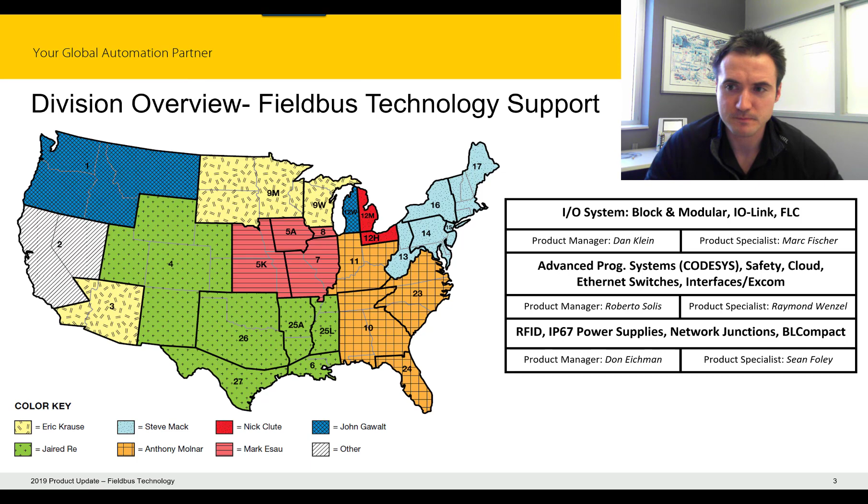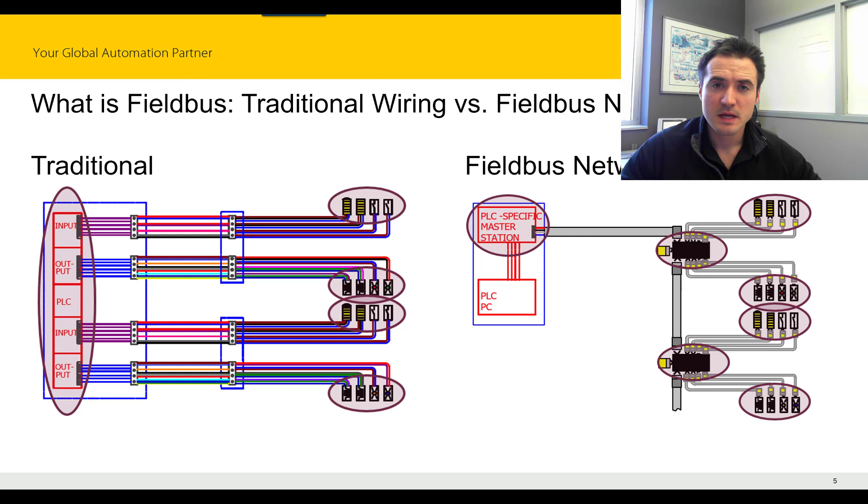So on the right is what Turck specializes in. It's a Fieldbus network. So instead of having each field device wired directly back to a PLC, it goes through these Fieldbus I/O devices, block I/O or modular I/O devices that are connected to these field devices, and then a single connection point, usually by an Ethernet cable or some other communication protocol, going back directly to a PLC. So it's a lot more efficient. As you can see, it's a lot less wiring. The troubleshooting is much easier, and it's also going to be a lot cheaper.

So the next thing we're going to cover is Turck distributed I/O. Turck has developed an under-the-hood technology. Our distributed I/O products are all multi-protocol. So they encapsulate the three different Ethernet protocols: EtherNet/IP, Modbus TCP, and PROFINET. They're also available in flexible topology types, so star topology, line topology, and ring topology. Okay, so what are our distributed I/O products?

Firstly, it's going to be our in-cabinet modular. So let me show you what an in-cabinet modular solution looks like. So this right here is our BL20. With modular, the key thing you're going to want to consider is flexibility. So our modular I/O, this is the BL20, it's going to be an IP20 solution. So BL20, IP20. And so this is designed to be in cabinet.

Because it's IP20, it's not resistant to things like dust and liquid, so it has to be in some sort of cabinet. But the key thing here is you have flexibility. So you have your field devices, your sensors in your application going back to these I/O cards. And you select your I/O cards depending on the type of field device you're using. So if you're using discrete inputs or analog inputs, you select the corresponding card, and then you constantly expand the modules depending on what you're needing. So you could constantly plug in modules to fit the application that you're using.

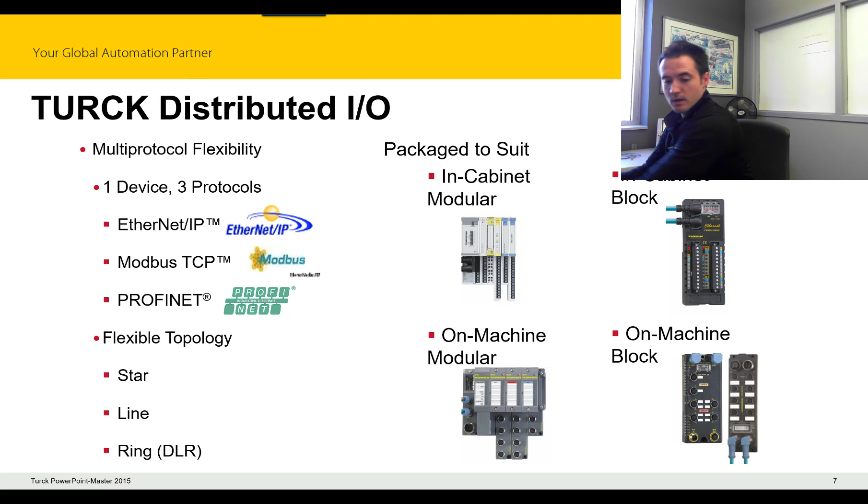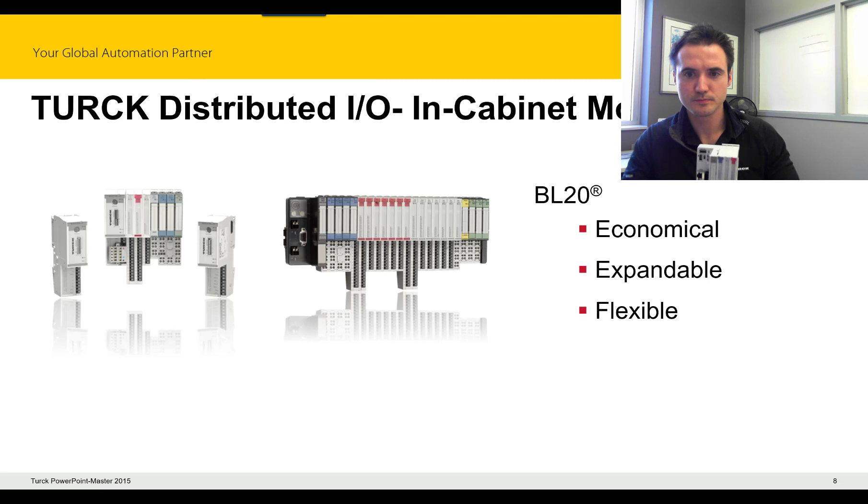So like I said before, covering it again with the BL20s, key things to cover: it's expandable, so you can pull out the modules, clamp them back in, and you're good to go. It's expandable, flexible, and also very economical. Similarly with the on-machine modular, it's rugged. It has that flexibility, so you could select the right I/O card for the application depending on the type of field device you're using. You can expand it. So this is your I/O card, and you select this based on the type of field device you're using in the field.

And the one major concern I see with a lot of people with the modular stuff, like the BL20 and the BL67, is it can be a little intimidating at first to figure out how to select the right part numbers for all these different components. And the thing I say is not to worry there. We've got some great resources for how to do that. We have a how-to video that shows you how to build a BL67 station in minutes. It's not difficult. We use a software called Packware to do it, and it's a breeze.

It's really quite simple. As long as you have the software downloaded, you basically give the criteria for what field devices you're using, what protocol you're using, and it automatically checks and verifies that the station part numbers you've selected are compatible, and you're good to go. It creates a station report. And we're going to cover that in the lab, so I'm not going to go into it too much now, but if your concern is about modular, selecting all the part numbers and it being tricky, not to worry. We've got some great tools out there for you.

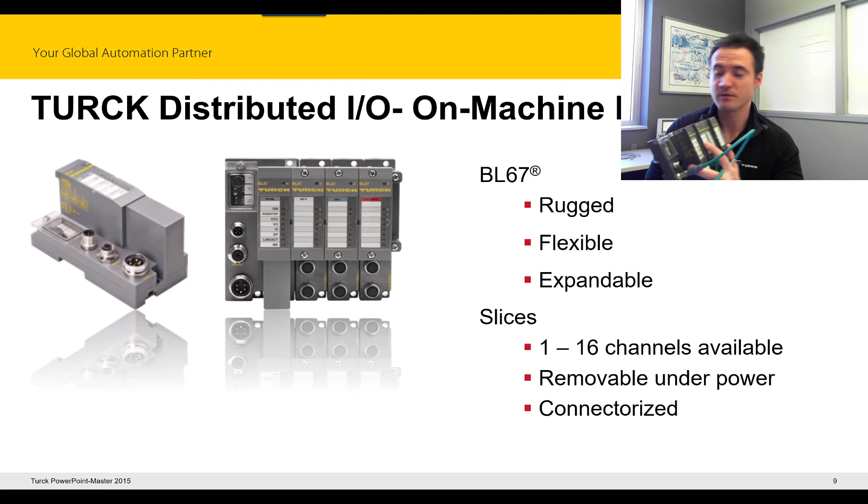Next thing will be this image here I wanted to show as well, just showing the ruggedness of the BL67. As you can see here, the BL67 is located outside in a process plant. As you can see up here, there's snow. The BL67 is rated for temperatures down to -40 degrees Celsius, so it can survive in the cold just fine. And just to show you, it's exposed to the elements and it holds up just fine.

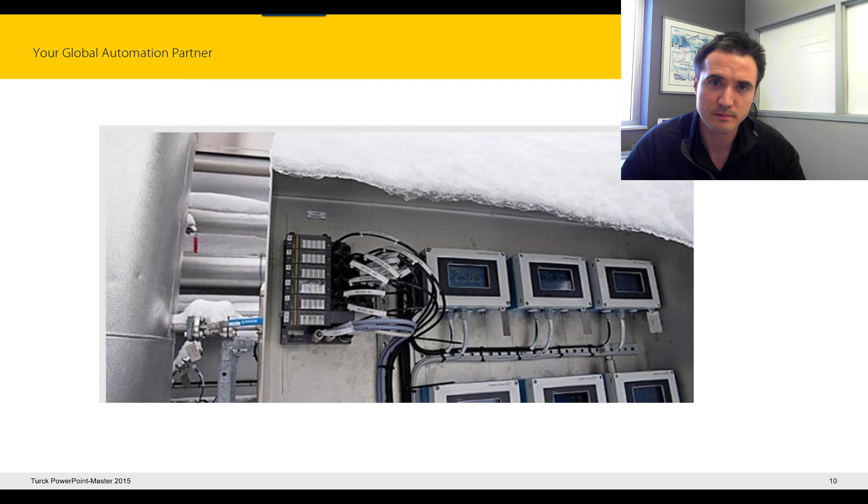As I mentioned before, for selecting the modules for modular I/O options like the BL67 or the BL20, we have a tutorial video called How to Create Station Reports, and that'll help you select all the different components for building a BL67 or BL20 station. The video is about 4 or 5 minutes long, great to follow, and if you have a customer who's trying to build a station report, it's great to send out to them as well. Be sure to check out that video. It's a good tool to get you started.

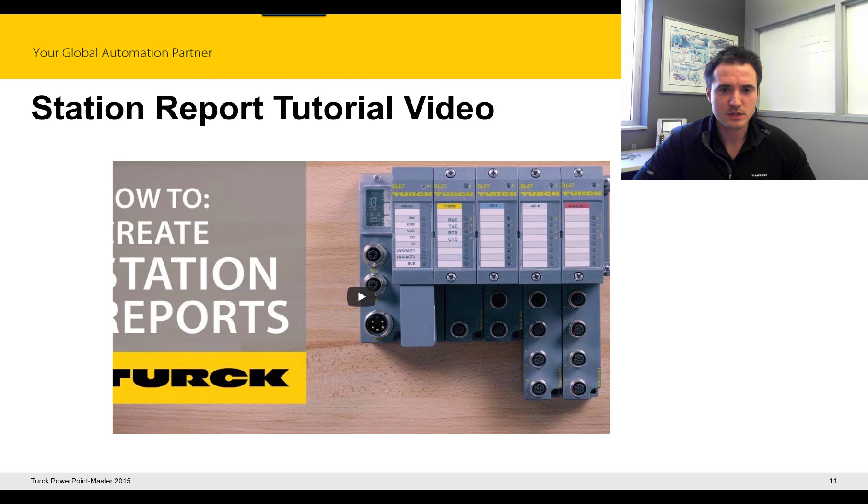As I said before, in cabinet block, we have solutions like this. They're very economical, very compact. I mean, you can fit this in your back pocket. It has fixed I/O configuration, so it doesn't have that same level of flexibility as maybe the BL20 or BL67 does. But if you know you're using a certain amount of discrete inputs, it's a great one to have and a very economical solution.

Let's go into on-machine block now. Whoops, sorry about that. Jumped ahead a little bit.

And another thing that's important to mention is that these are also available in all sorts of different protocols, not just your Ethernet protocols. They'll be available in AS-i, DeviceNet, multi-protocol Ethernet, like I mentioned before, and Profibus. Similar with the block I/O, it'll be available in all sorts of different protocols: AS-i, CANopen, DeviceNet, industrial Ethernet, and Profibus.

We have this, our TBEN-L, it's a TBEN large, with kind of fixed settings for what you're using. We have a lot of different part numbers depending on the type of field devices you're using and connecting to this. This one's the discrete input version, so it's a TBEN-L-16DIP. In selecting blocks and these components, it's good to become well versed in Turck's part numbering scheme. I created a video earlier that goes over the My Turck app, and it shows you where to find those part number keys. If you check out the part number key, it'll help you select the right block for the application.

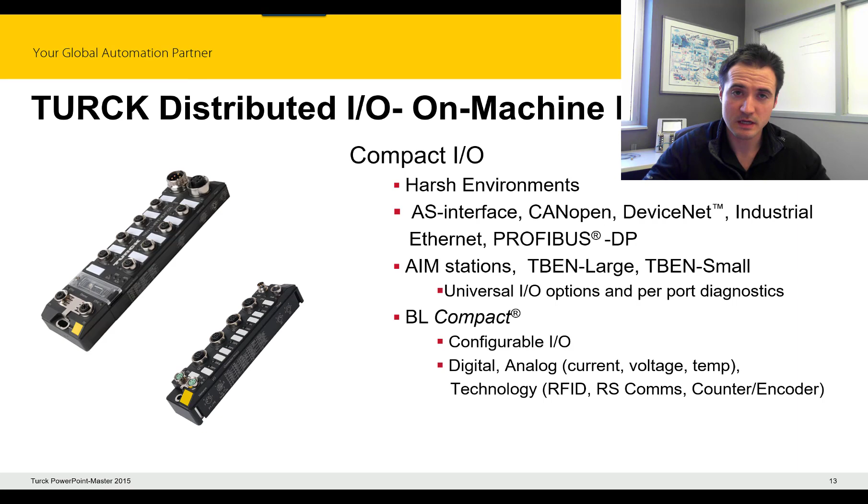And that brings me to, with our block I/O devices, both on machine and in cabinet, we have this really amazing software called ARGEE. ARGEE stands for Really Great Programming Environment. It's a proprietary web-based programming environment that Turck developed that allows you to have simple logic on the block without the need of a PLC. So let me just show you an example here.

So take a look at this application. It may not look like much at the beginning, but this is all controlled by a single block, no PLC necessary. It's a yogurt carton, and there's a small camera here on the right that's detecting if a label is missing or not. If a label is missing from the carton, the camera will send an output to this block, this TBEN small, and the block has an ARGEE program written onto it. When the camera detects that there's not a label on the carton, it'll set a timer in the logic on the web-based program environment, and then it'll turn on this air cannon. So let's just watch it again here.

Let me just do this. My apologies, having a little bit of technical difficulty. Let's see here. I want to show you the video again, but for some reason it's not working for me.

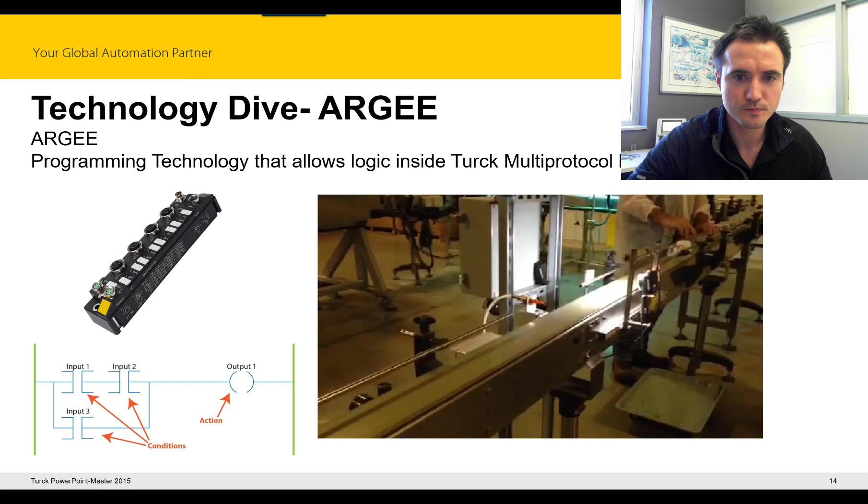And also with ARGEE, imagine having a little field logic controller about the size of this, fit it in your back pocket, show it in front of a customer, plug it in, launch the web-based program environment, show how many cool different things you can do. It's a really powerful demonstration tool because you have a demo that you could fit in the palm of your hand that's really cool and has a lot of power.

So we also have a tutorial video for that. It's called How to: My First FLC with ARGEE. The ARGEE video goes into the first steps of launching ARGEE, and we go through a very simple application example. In this application example, I have a sensor here, this little yellow sensor that's counting toy cars, and it counts 6 cars, and then it turns on this, I'm not sure if you can see it here, but there's a small little Banner light.

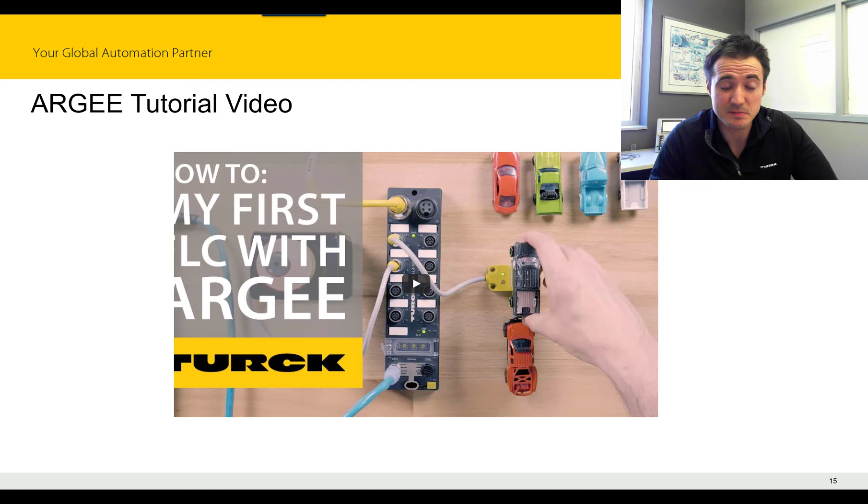So once it counts 6 cars, it turns on the Banner light, and then after 5 seconds the light turns off. So it's just a really simple application to introduce you to ARGEE. The video is 5 minutes long, so it's a good one to check out. It's a really cool tool to have, and also to send to customers as well who might be getting started with ARGEE.

So Turck RFID, we have a full line of RFID transceivers and tags as well, and different interfaces too. So like I said, with our blocks, we have RFID channels that can go back to your PLC. We also have it available in modular I/O solutions. So we have RFID slices that are available, and similarly with the BL20, we'll have RFID channel slices, if you will, that allow you to interface your RFID transceiver back to your PLC.

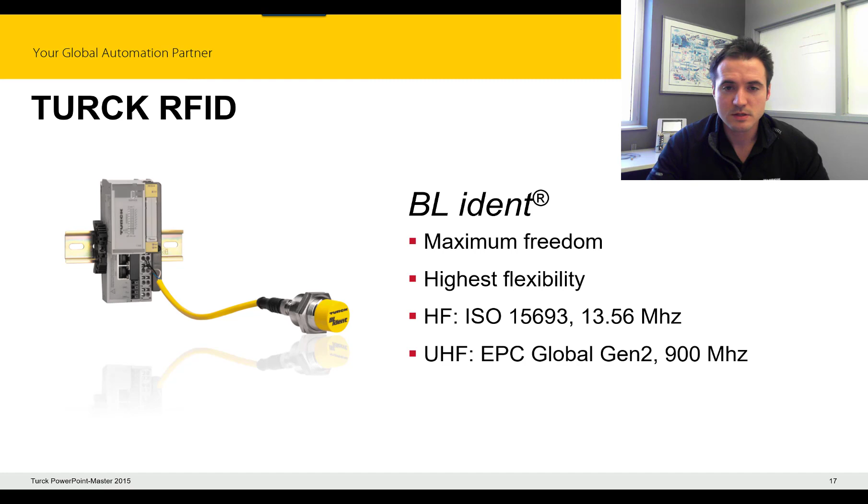We're going to dive into RFID later on in this seminar, so I'm not going to go into too much detail, but RFID stands for radio frequency identification. It's the wireless transfer of data for tracking. A tag is a small device with microchips and an antenna, and that gives them the ability to store and transmit data. The transceiver is the brains of the outfit and reads data from the tags and writes data to the tags.

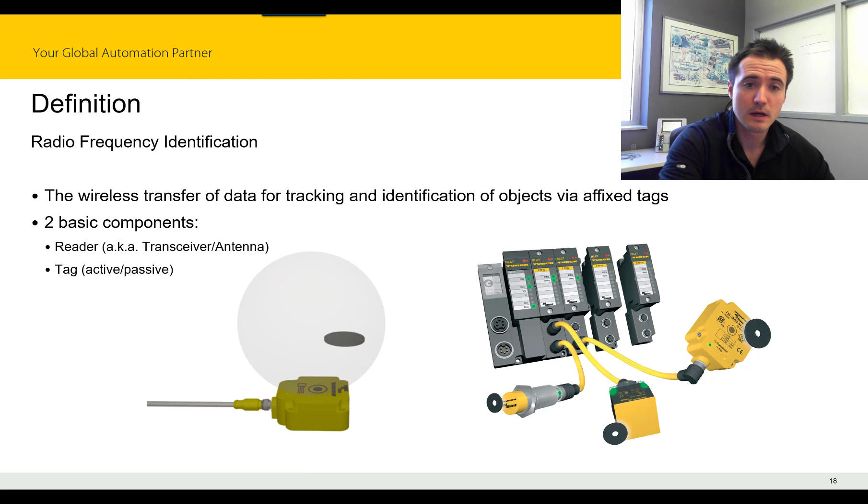So you can see here it's a BL67, so we've got an RFID channel connected with a cable to these different transceivers, and then you have the tags that you're reading and writing to. So we have the reader, the tag, and the interface, or the key components. Turck has a full line of different transceivers. I won't demo this video. You could watch it when you have time.

But transceivers, we have a lot of different transceiver styles and a unique blend of design. So let me just show you a few of the transceivers we offer as an example, just to demonstrate the sheer size. There are going to be ranges for all of our transceivers and tags. In general, the larger the transceiver, the larger the range you're going to have for reading and writing data to the tag. So an example would be, we have one that's about this small little guy, like this.

You know, the range is not going to be very high in this one, but if you look at, say, this one, this is an HF, our largest HF tag. It's like the size of a pizza box. This one's going to have a much larger range. As you can see, it's massive. And it's not just those.

We have different options here, tons of different transceivers to choose from, and we try to match the transceiver for the application. So RFID applications are really good to get BDMs involved in, because it just needs some getting started, trying out different transceivers. They could bring in different options to test out for the application. And then I also want to show you some RFID tags that we have.

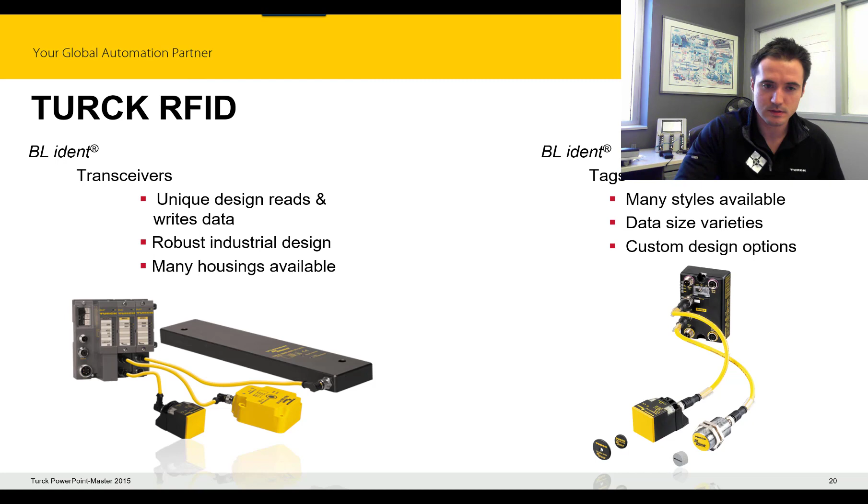But for UHF, typically the range is going to be in meters. For HF applications, typically the range is going to be in inches and feet. So it's not as broad of a range. We're going to dive into more depth on RFID later. Sorry, here.

There we go. We also have Turck Vilant Systems. So this is an exciting development for RFID. For the first time ever, since we acquired Vilant Systems, we're able to provide full RFID turnkey solutions. So full system design, consultation, implementation, and more. So start to finish, an RFID application where we could bring in whatever is necessary to solve the application and design it for the customer, and then provide them the software, a start to finish turnkey RFID solution. So we consult them, we review the application, and we have full 24/7 support available for the customer as well.

This is unique. There's not a single company in the United States that has the same abilities as this. It's a truly unique solution. We're extremely excited. So if you have an application that might need something like Turck Vilant, feel free to reach out to us. Raymond Wenzel is a specialist for Vilant systems, so he'll be a great resource to reach out to if you have any questions on Turck Vilant systems. So be sure to reach out to him if you have any applications that might require Vilant.

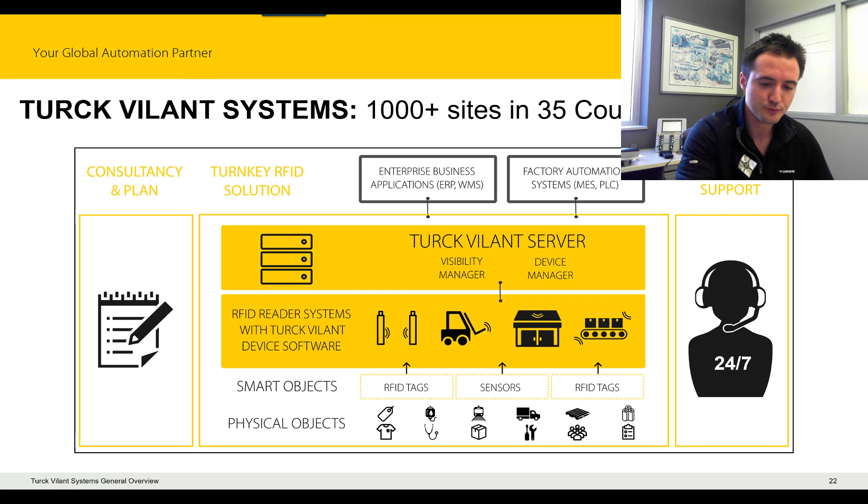So I'm going to go into a little bit of a technology dive here. A really cool product that came out recently is our PD20. So this is our PD20 device, and basically what it is, you can see there's a small little audio jack here, and it plugs into your phone. The cool thing here is we have an app. Let me just show you it here. I'm not sure if you can see it very well on my phone, but we have a Turck RFID app that's free. And basically what you do is you plug in using this jack here.

Using this jack on your PD20, you plug it into your phone on the bottom, and then you launch your RFID app, and it's free, and you can read and write data to tags using the RFID app. What's cool about this is that it's really economical. RFID handhelds typically cost thousands of dollars. This is $500 list price. So it's a mobile UHF reader and writer.

The app is free, so if you want to search for the app, just go to the App Store or the Google Play Store; it's available for Android and Apple devices. If you just search Turck RFID, you'll find the app there. The key thing is it's IP20. The exciting development is we have an IP67 more rugged solution coming out soon that uses the same technology.

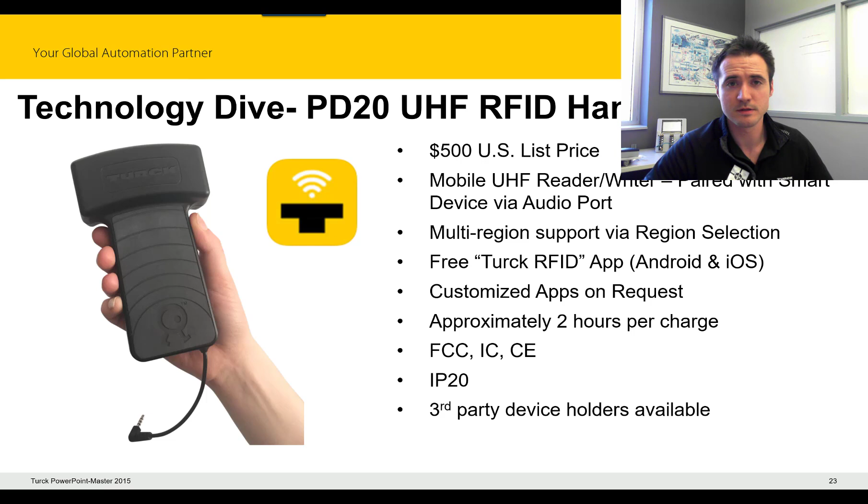The new development with the PD67, however, is in addition to UHF reading and writing, it'll have HF, and it'll also have barcode. So that's a really exciting new product we have for RFID that's coming out. Another thing is we could do custom apps for this. So if you want an Android device that has a custom app for a customer, we have the ability to create custom RFID apps.

Some safety products. Safety is pretty new to Turck, but we're coming a long way. Kyle Hall is a tremendous asset to our team for his expertise in safety. He knows a lot about everything, but he's really specialized in safety. He's great. So we have IP67 safety hybrid modules. So basically you'll have a mixture of safety inputs and also traditional inputs, your safety I/O and also your discrete I/O on the same block.

So what's the benefit of that? A lot of applications would have a safety block with just safety inputs, and then also a traditional block with maybe discrete inputs or whatever inputs they have in the field. It's not a good use of space and also money. It's not very cost effective because a lot of the time they're not using all the safety inputs on the block, and they're not using all the discrete or analog inputs on the traditional block. So we created a hybrid block that uses both safety and traditional inputs on the same device. So it's much more efficient, saves a lot of money, and it's a unique solution that we're pretty excited about.

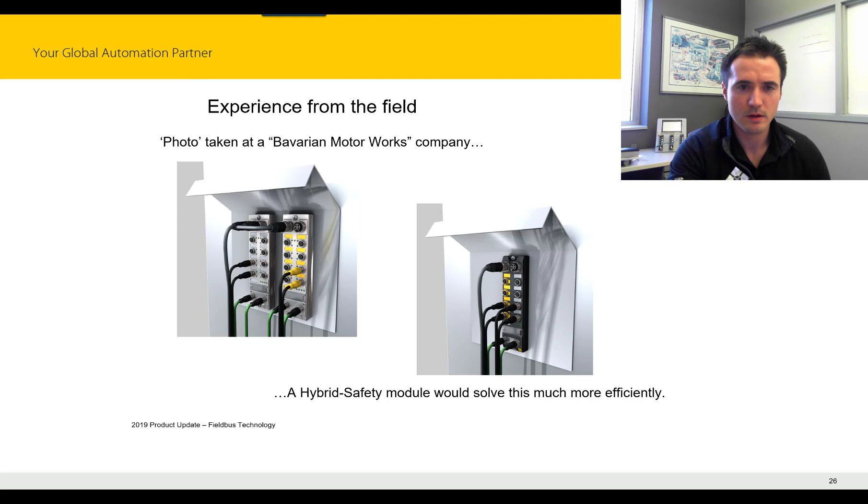Okay, so Advanced Programmable Systems. We're going to do a lot of labs in this training that are going to cover CODESYS, so you're going to become well versed in CODESYS. By now, hopefully, you'll have CODESYS downloaded and installed on your PC. It's free software you can download on the Turck website. CODESYS stands for Controller Development System. It's a development environment for controller applications.

It was started by a company called 3S in 1995 in Kempten, Germany. A really cool thing about 3S is that they're always investing in R&D to constantly improve the software. I think 75% of their budget goes back to R&D. So they're always on the cutting edge for creating cool features of CODESYS.

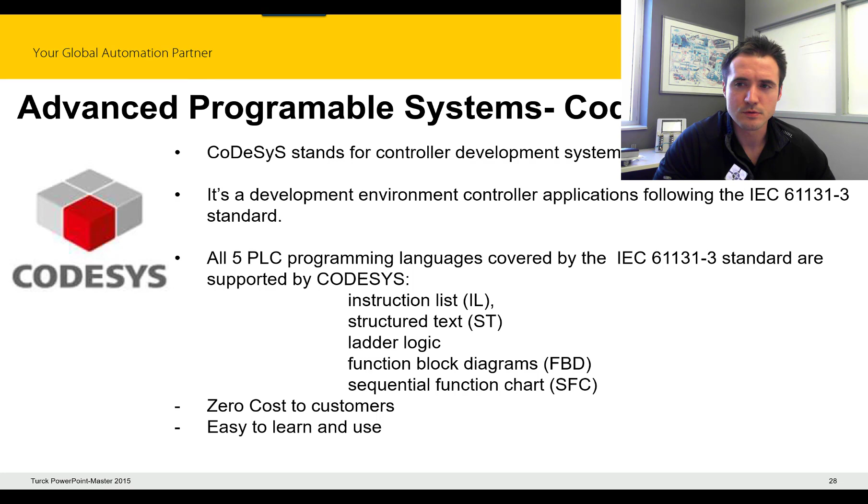So all 5 PLC programming languages covered by the IEC 61131 spec are included in CODESYS: instruction list, structured text, ladder logic, which is probably the most popular, function block diagrams, and sequential function chart. A key benefit of CODESYS is it's zero cost to customers. Not a lot of PLC software can say that, and it's easy to learn and use. We have tutorial videos for it as well.

So Advanced Programmable, the newest iteration is version 3. The version you should have downloaded is CODESYS 3.5 Service Pack 12. That's the latest and greatest that we have right now. Our programmable is available on a few different platforms, like modular I/O devices such as our BL20 and BL67.

A key feature of this technology is that it has a USB host. So if you load your CODESYS program onto a USB stick, you could plug the USB stick into your programmable device, and you're off to the races. You don't have to do any installation. You just load it in and it automatically loads. It's a huge benefit. So there are nice improvements with the latest version of CODESYS.

There are 2 Ethernet ports available on these 2 different devices. These are the programmable gateways: the BL67 programmable gateway, up to the right, and the BL20 programmable gateway here to the left. You can see both of them have that small USB port there, and that's a huge benefit. And the nice thing is you have so much flexibility with your PLC program, because you could add different modules depending on the application.

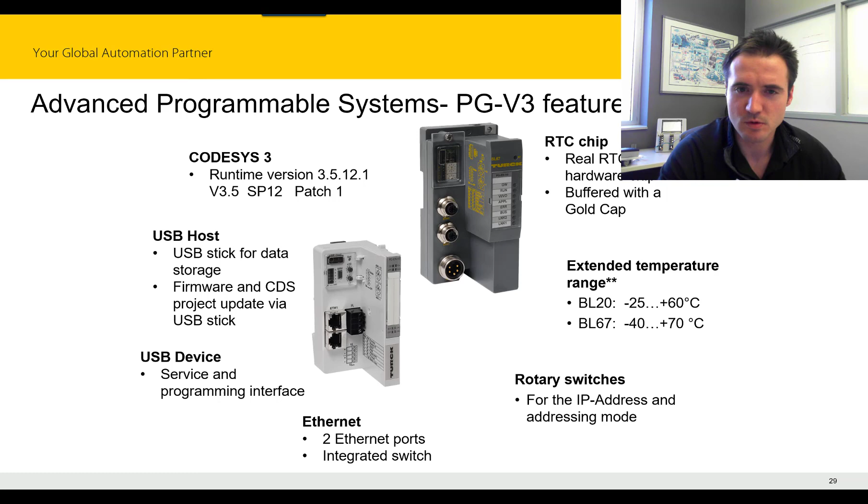Also, CODESYS can be used to program our programmable gateways. It also can be used to program our HMIs, like this one here. Our HMIs are very unique in that they have the ability to act as a traditional HMI, just status indication buttons, but also as a PLC. So these HMIs can act as PLCs as well, which is really cool, and it's programmed using CODESYS.

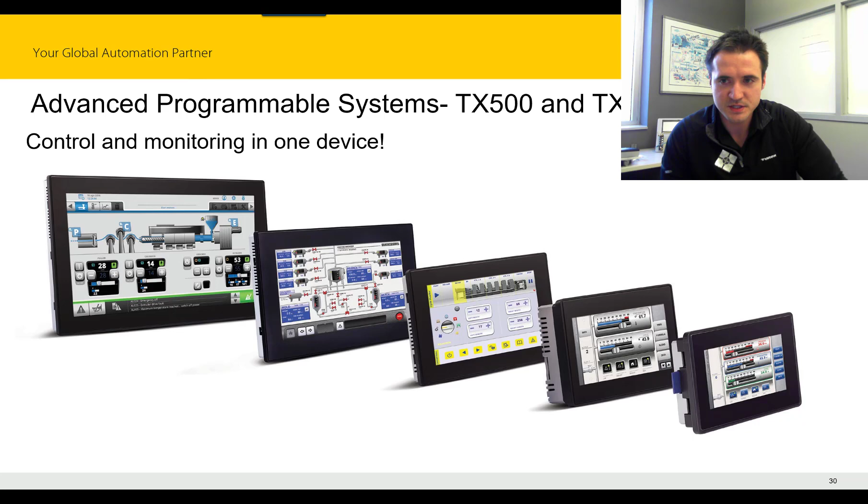So we have two different families for our HMIs. Our latest and greatest is the TX700, which has a beautiful capacitive touchscreen, and we have our TX500. The way our part number keys work for our TX HMIs, think of it this way: TX507 would be a TX500 HMI 7-inch screen. TX513 is a TX500 13-inch screen. TX721 would be a TX700 21-inch screen, so a big screen. So that's how our part number keys work.

So we have a whole variety of different sizes, all the way up from 5 inches to 21 inches. Very powerful device, A9 processors, a really nice display that you can use. It's a glass design, really robust as well. The thing I love about the TX700 is the capacitive touchscreen. It responds just like your Android phone or your iPad would. It's very responsive, and that's a huge part of the usability.

In the field, they don't want buttons that don't work. They want it to respond well. The capacitive touchscreens really respond beautifully. Again, with the TX700, you see there's a USB port here at the bottom. So you can load your CODESYS programs at the bottom of your HMI. You just plug in your USB stick in the bottom there, and you're good to go.

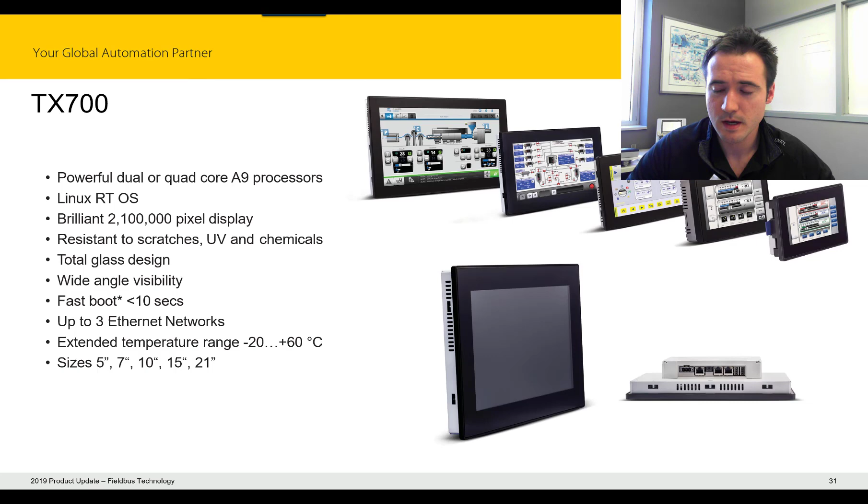Lastly, with the CODESYS devices, we have our TBEN PLC controller. Similar housing to this, our TBEN-L. It's a PLC though, so it could act as a PLC or a master. So it's a really cool device. If you want to look into the TBEN PLC, again, it's a ruggedized solution instead of the block I/O. So it has that broad temperature range, IP69K, negative 40 degrees all the way up to 85 degrees. And it has the USB host on it as well, so you could load programs quickly and easily. But sorry, I got distracted there.

The TBEN PLC also has a really cool tutorial video. This is great even if you're not using the TBEN PLC, just an introductory tutorial video with CODESYS. So be sure to check it out. I really highly recommend you view this video. It goes through the installation steps for how to install CODESYS and then install the package files, and then it shows you how to navigate CODESYS. So that's a real benefit: which tabs are where, how to set up a simple project, how to do some simple logic.

In this example, it's me counting cans with this small capacitive sensor here, counting 5 cans, and when 5 cans are counted, it turns on an indicator light, this little light here. It changes color, and then you can reset the counter and reset the light by tapping this other capacitive sensor. So it's a really simple ladder logic example in CODESYS, but it gets you comfortable navigating CODESYS. So check it out. It's 5 minutes long. It's a really cool little video to review.

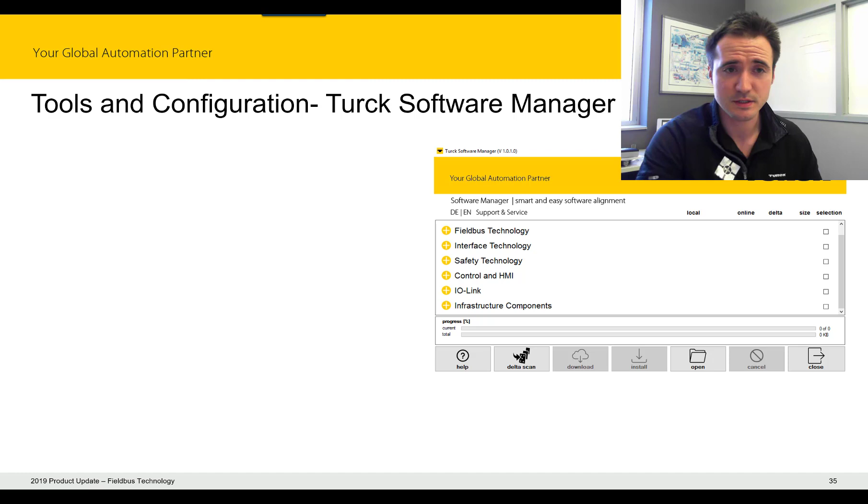So tools and configuration. Turck Software Manager is a fantastic tool. So where does Turck Software Manager come into play? Fieldbus technology tends to have a lot of software components as part of it. So Turck Software Manager is a huge time saver in that it clearly displays and updates all Turck software components that are installed in your PC.

So if you launch Turck Software Manager, you download it and do a quick scan, it'll find all the Turck software you have on your PC, and it'll check to see if it's up to date and if you need an update. It'll also check to see if you have it, and it'll let you know. It really eliminates the need for time-consuming searching and updating individual files.

Before Turck Software Manager, I would get calls from the field saying something's not right, I think it's a software component. It'd be like finding a needle in a haystack sometimes, because there'd be so many software components installed. It really narrows it down, so it saves you a huge amount of time. So you don't have to uninstall and reinstall everything again.

It'll navigate to that specific component, whether it be a package file or a DTM or an IODD for IO-Link. There's all sorts of different software components, and making sure those are up to date is really important. So this is a huge thing that you should have downloaded. To download it, you just go to www.turck.com/TSM, so Turck Software Manager, and you'll be able to download it there for free.

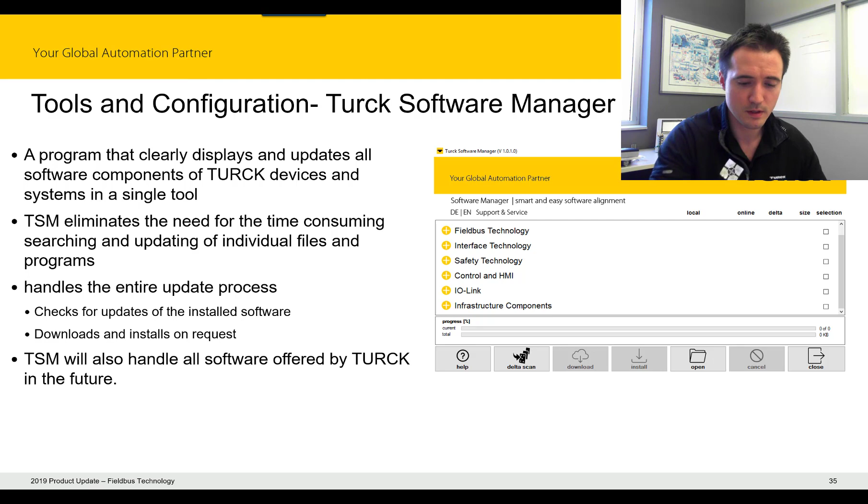It's great. We also have a Turck Software Manager tutorial video. So if you want to get started with Turck Software Manager, be sure to check this little video out. It's 2 minutes long, short and sweet. It'll show you start to finish how to download it and how to navigate it. It's definitely worth checking out.

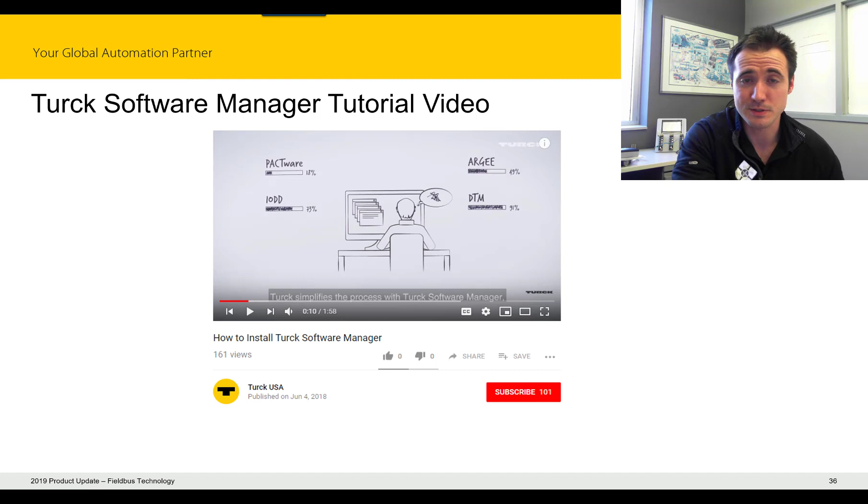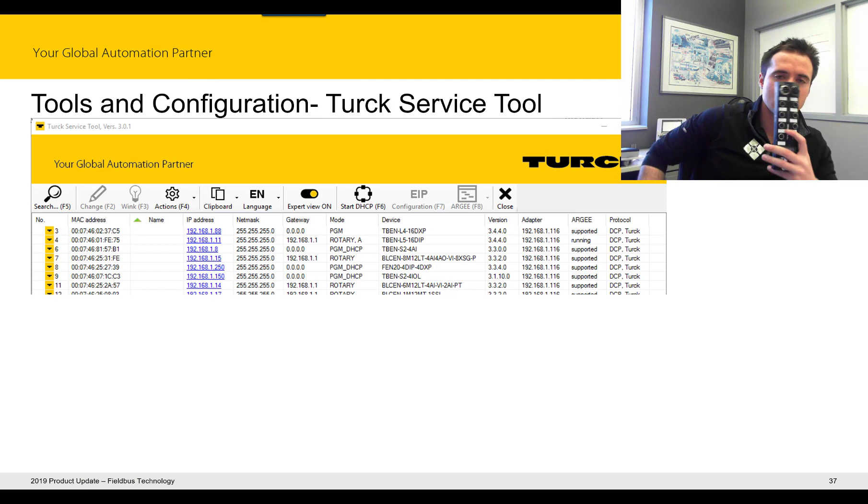Another cool thing you could do is select a certain IP address or device. It'll give you the device name as well, and then you could wink at it. So you could click this little wink button, that little light bulb, and an LED on the block will start flashing, and so you'll see which block you're connected to. So that's really important if you have a network of dozens of devices and you want to narrow it down to one device that might be giving you an issue.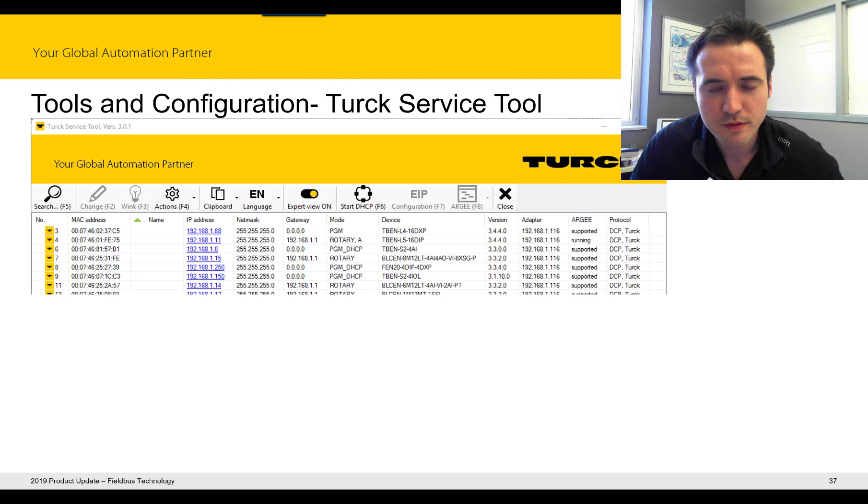So the LED will start flashing, you'll see it flash very brightly, and you'll be able to wink at it and see which device is which. A lot of cool things that I'm going to cover in more detail in the next presentation. There's an actual presentation on each of these tools, and I want to demo them for you as well, but definitely something that's good to have installed.

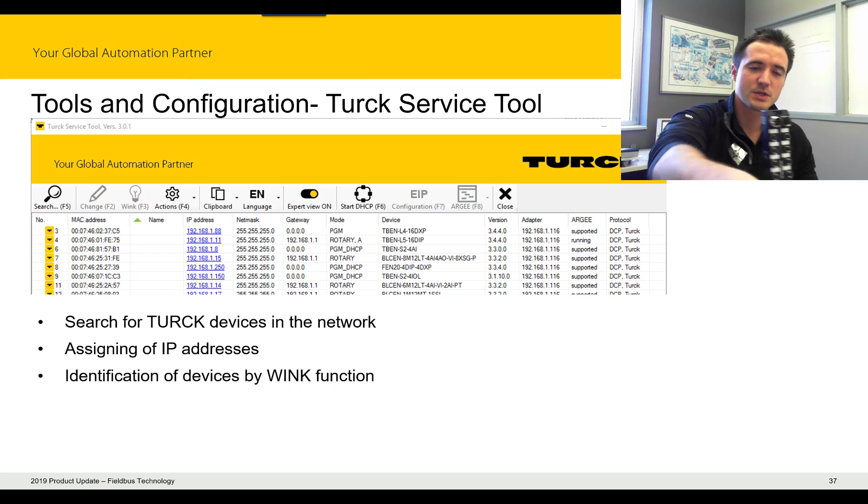You could also assign IP addresses this way. We have a few ways to assign IP addresses. There's the dip switches, but you could also assign it in Turck Service Tool, which I think is a little bit better. Personally, it's just a little bit quicker. But yeah, it's great. There's a lot of other different features. You could check the firmware version as well. So under version here, you can see if you have the latest firmware. Sometimes that comes into play.

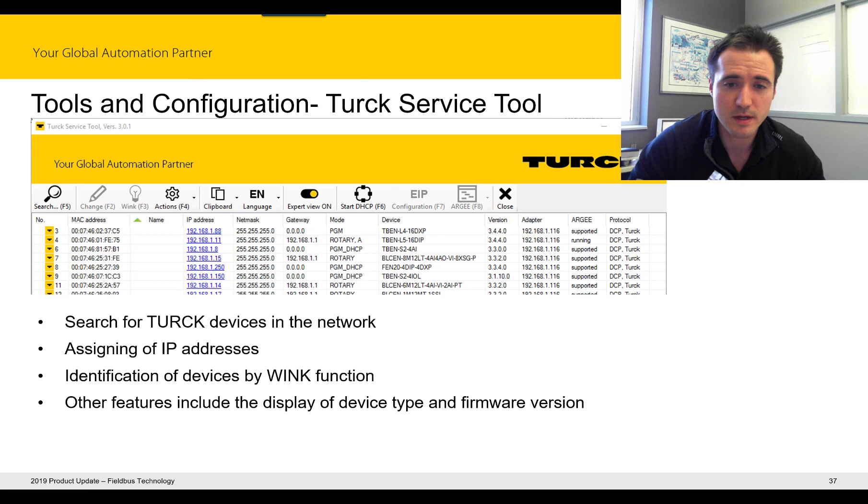Another thing I'm going to cover later on is the web server. This is great for access to station diagnostics. So all you need to do to launch the web server is to type the IP address of your device into Google Chrome, and it'll launch this web server.

It can be bad news sometimes, so be careful when you're changing the password to be sure to write it down and make note of it, because that can be an issue. So a ton of great information on the web server, access to station diagnostics. So if you're having an issue with a certain block or gateway, you could access the station diagnostics and see what might be going on. It'll give you some information there.

You could change the IP address of it. You could even parameterize I/O, so you could parameterize certain ports on a block, on maybe a channel, on an analog channel, on an analog input slice. You could change it from maybe a 4 to 20 to a 0 to 10, depending on what you're using. I'm going to dive into a few different examples of that when I go through the next presentation.

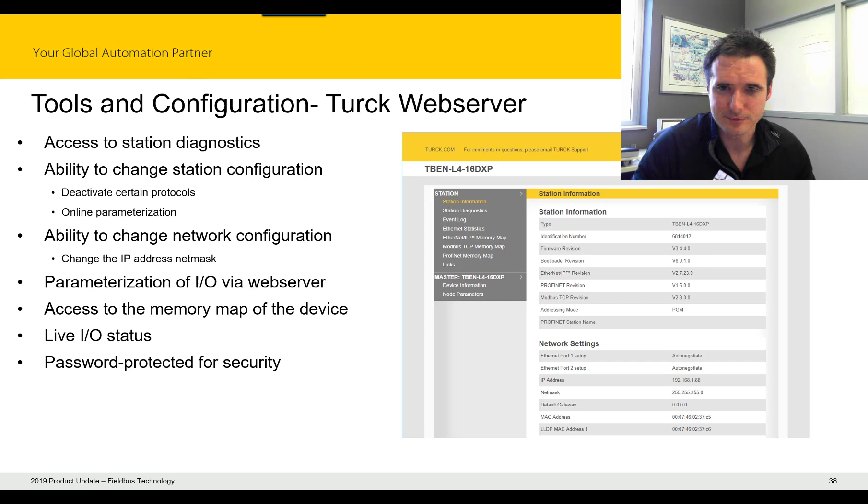So Pactware is a software I mentioned a little bit before. It's good for creating station reports. It's also a great diagnostic tool that we use with Turck's BL67 and BL20 and BL Compact products. You can use it to parameterize the block, so changing configuration like you could on the web server. It's another option to do that.

You could read process data. It's great for diagnostics. You could do a reset of a station, so you could do a factory reset. You could actually do a factory reset from the web server as well. There's two options to do a factory reset on a Turck device, Pactware or web server. And then also a data mapping report.

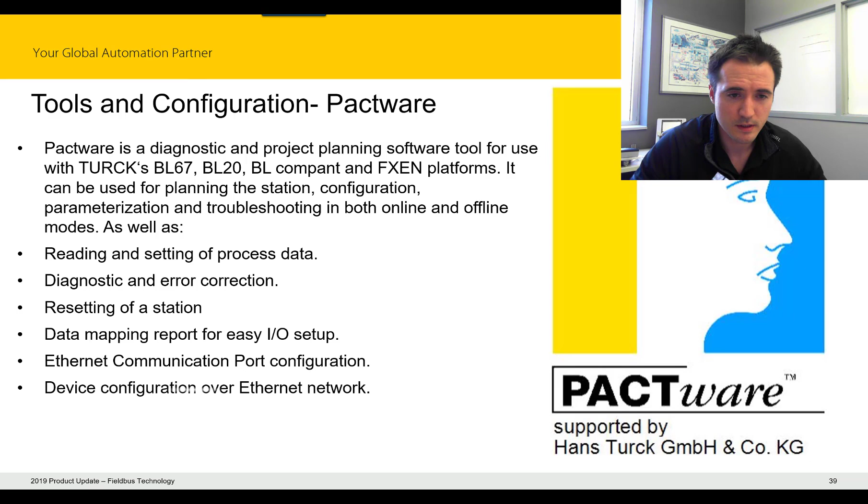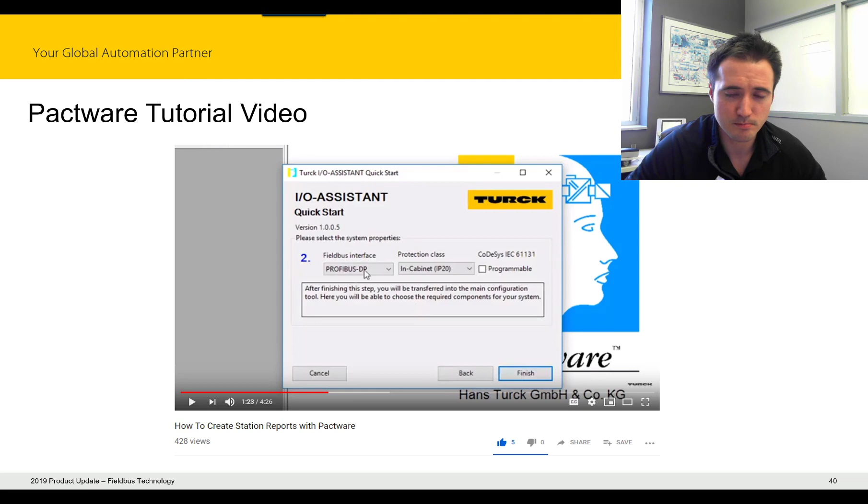Like I mentioned before, there's a how to create station reports with Pactware tutorial video that I highly recommend viewing. It goes through an example, shows you how easy it is to do. Be sure to check it out. There's a lot of information you could get from a station report. And once you see it, you'll understand what I'm talking about. It's a really powerful tool, a huge time saver as well. And it's not difficult to learn.

Okay, lastly, some accessories that we offer. We have our full line of different accessories. So we have power supplies, network junctions, special adapters. This comes into play a lot if you have maybe a BL20 that's in a cabinet and you need to get the communication going back from the field to the cabinet. Certain adapters, like wall plate adapters, can allow your signal to go through your cabinet and into the field. It's important to have the right adapters for that. So we have all sorts of different options.

In addition, we're so lucky at Turck to have the connectivity team who makes a full array of different Fieldbus connectivity options, whether it be Ethernet, Profibus, Modbus, DeviceNet. We have a full line of industrial connectivity for Fieldbus that are available and in stock. So we're in a unique and fortunate spot. Our products complement each other so well.

So that's all I had to cover for the Fieldbus training. I'm sorry, it must have been a lot. It's a bit of a longer presentation, but it's good to cover, and I think this will give you a good start for the rest of the training.